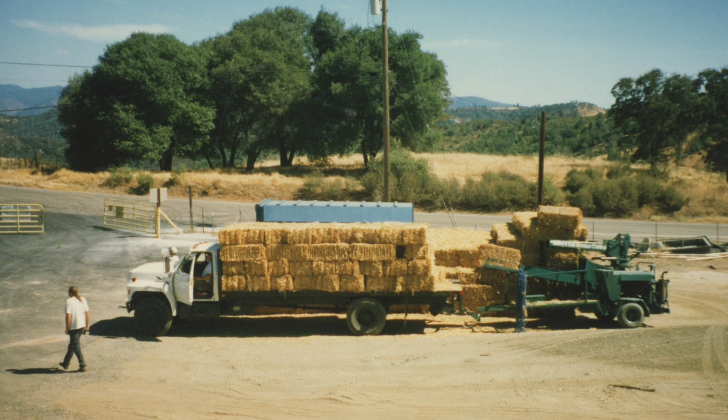Just introduce myself and my business partner. I'm Jay Selby. SSEC is our company. And this is Brandon Coppage. He's my partner in the business. Been around for 50 years. My dad started this company in '68. So he was a little ahead of the curve even before the EPA and other things. And we've done a lot of projects, a lot of your guys' work over the years, including Oroville Dam and some other big ones.

Sorry, I'm not a public speaker and my allergies are kind of getting me. So my voice sounds like it's shaking a little bit. It's definitely because it is.

So I try to put this together for you guys, looking at it from your guys' angle, like how to set up a job from the start and then all the way through inspections and maintenance. That's how we tried to outline this presentation for you. First off, we're going to be talking about the different hydraulic methods, the different applications, where those are effective, where they're not effective, and where different BMPs might be mixed in the middle of that as well.

So the keys to a successful erosion control project are going to be to conduct a soil test. This is something that we've been working with Caltrans a lot on the last 3 years, really getting in there up front and getting a soil test done so we know what we're working with. Now that can be very difficult because a lot of times the dirt hasn't been moved yet. And a lot of times excavators will go down 20, 30 feet, so you don't really know the soil conditions of what you're dealing with until the grading is done, right? But it is very key in having a successful project. We'll go deeper into that later.

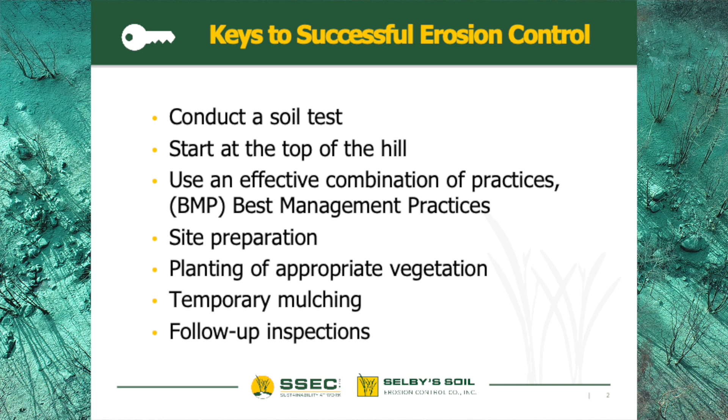So there are many methodologies for temporary, but a hydraulic application of hydromulch is definitely one of the most cost-effective ones in regards to stockpile maintenance or things like that. There's temp cover with plastic, and that can be kind of a bear to manage throughout the winter. So hydraulic methods definitely are the most cost-effective ways.

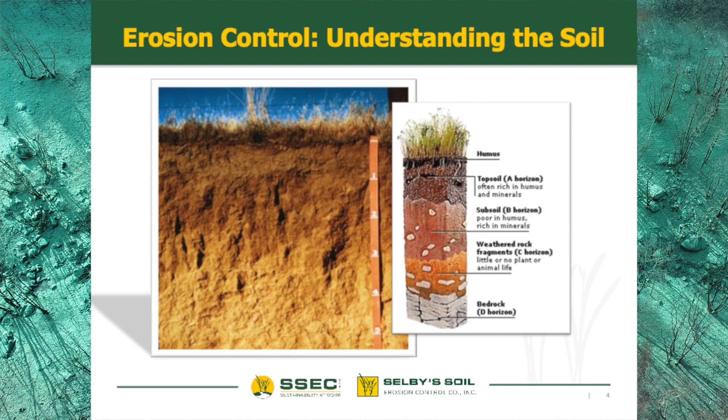To understand the soil is really what we're trying to do. If you look at the different layers of humus down to bedrock on this screen, as excavation of projects happens and an excavator takes more and more dirt off the top, we're left with these weathered rock fragments, and now we're trying to sustain plant life. We're trying to establish natives when we're down to that layer. So that's why the soil test is really so important, because we need to know what we need to do to help that soil start creating a good seed bed. So Soils 101 is if you take care of your soils, then your soil will take care of you.

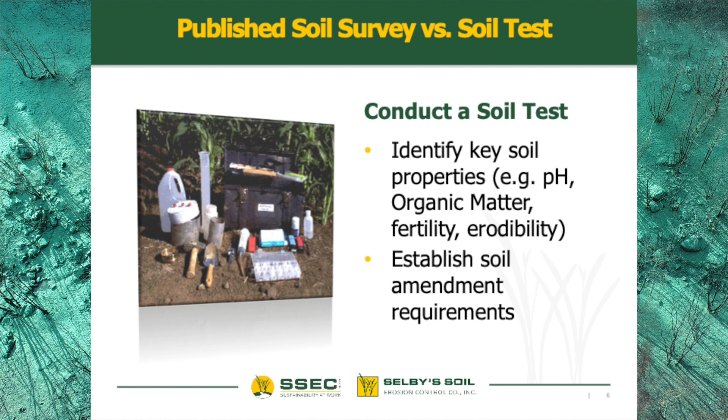So again, this is the soil test. I meant to bring a couple of little kits. I don't know if you guys are all familiar with soil tests or not, but you go around your project, you pick a few spots to dig up a shovel full, maybe put it in a 5-gallon bucket, mix that soil up so it's showing representations of all over your project. And then you can real easily throw it in a bag to send it to a lab. It's a less than $100 test, and now you have something to go off of.

So again, like I said, this is something that I think Caltrans is right there. They're just about to pull the trigger on their new spec writing and make this part of every project moving forward. They're just trying to figure out where to plug it in, because from a contractor's side, we've already bid the job before the excavations happen, and then how do you manage that?

Can you do it? Yeah, a lot of our work we do foundation cores, and maybe we could test at the level of excavation. So we'd have to work with geology. Exactly, but it'd be great to do up front, because then you can know your right fertilizers, your right amendments, and we'll go a little bit deeper into that too. But yeah, that's a great point. They don't usually do that on Caltrans style work, but your guys' work, yeah, with the core samples, yeah.

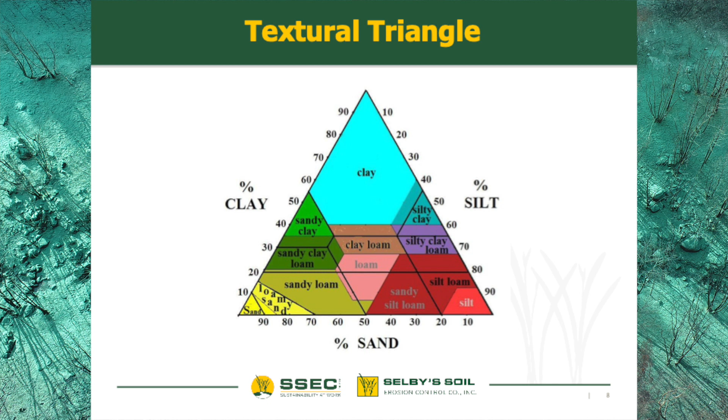So soil texture, erodibility. It describes the three sizes of soil particles; the three major ones are sand, silt, and clay. And I'm just going to roll right onto the next slide. This is a great tool to figure out what kind of soil we're dealing with. And if we know the erodibility of the soil, we know its characteristics, it's going to be easier to design and implement a good hydraulic or BMP solution to make sure we don't have erosion.

So you can see there, on the scale, where they are, and then after your soils report comes back, you look at where you're at on this triangle, and then say, okay, some of these hydraulic methods might not actually hold up. We might have to go to a rolled erosion control netting or something.

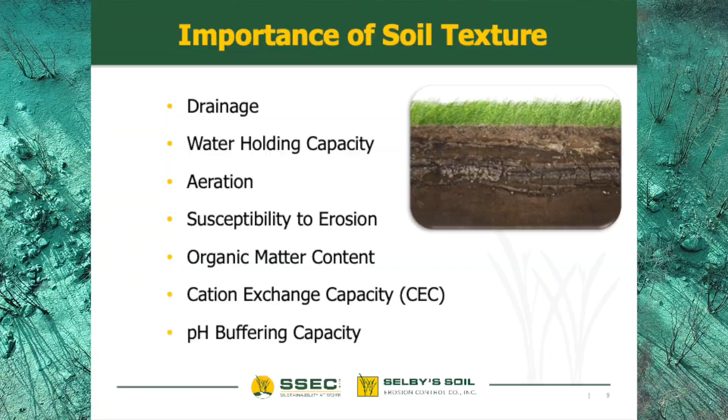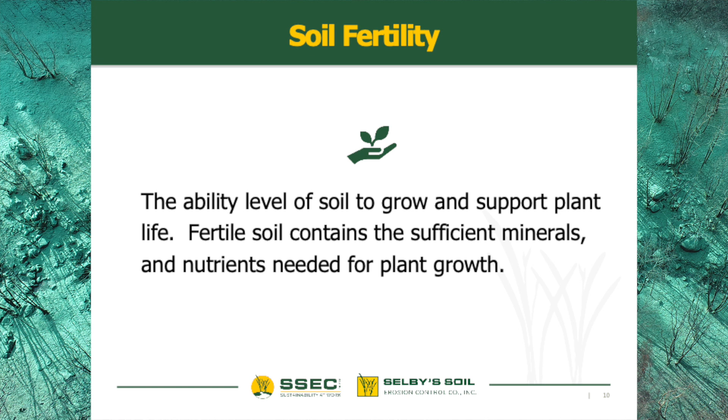Okay, so importance of soil texture. Drainage, the water holding capacity, the aeration, the susceptibility to erosion, the organic matter content, and the pH capacity and buffering. So those are the main things we're looking for when we're looking at the soil texture. Soil fertility is the ability of soil to grow and support plant life. Fertile soil contains the sufficient minerals and nutrients needed for plant growth.

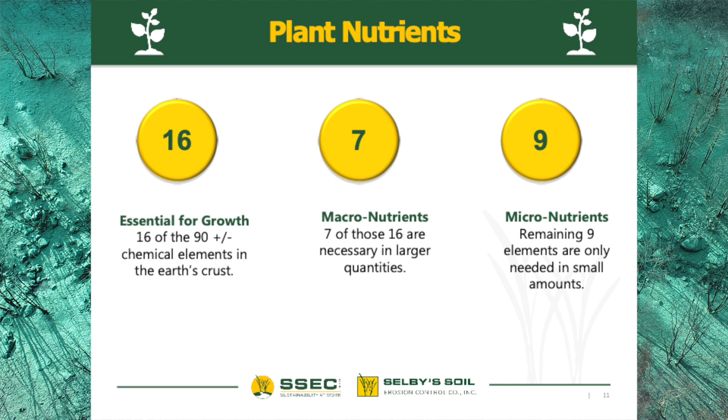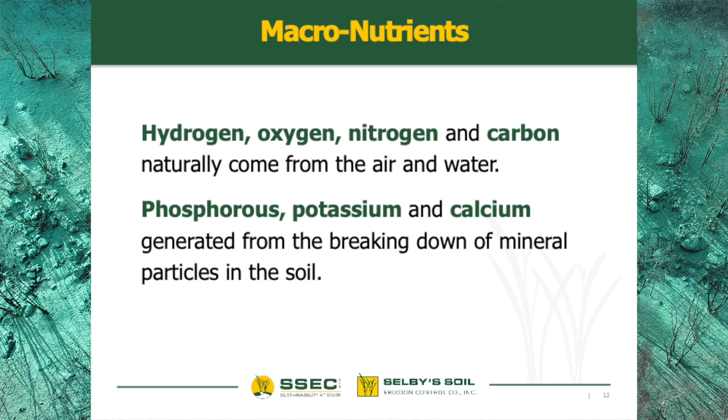So 16 of the 90 chemical elements in the Earth's crust are essential for plant growth. 7 of those 16 are called macronutrients, which are there in the middle, and then the micronutrients on the right are the other elements. So here's our macros: hydrogen, oxygen, nitrogen, carbon, phosphorus, potassium, and calcium. So that's what we need to get growth.

So again, the soil test tells us a lot. We can run a soil test, look at our soil pH and find out what's going on there. And there's a lot of amendments we can utilize to balance the soil. But the problem we see a lot is we do projects where it takes 6 months, 9 months to realize there's an issue. Like, this didn't grow right, what's going on here? So now you've lost a whole season, really. So again, the importance of trying to get this stuff done up front.

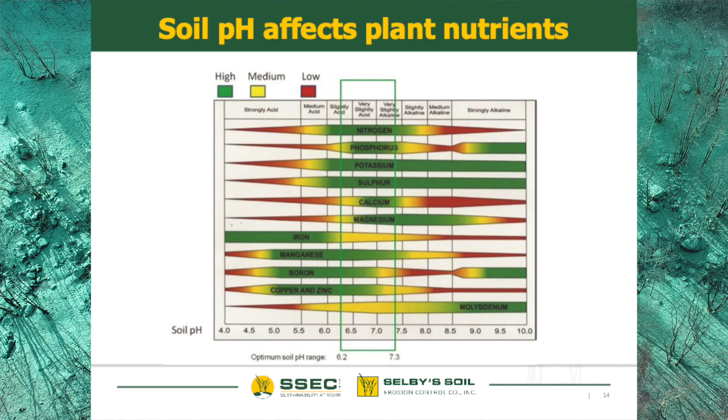This gives you a better and easier to look at screen here. It gives us our tables and what we're looking for, those macronutrients, and seeing where we're at, if we're way too acidic, if our alkalinity's way too high. And again, these are all tools we can use to design better fertilizers and amendments to go along with it. So any questions so far on soil testing or pH levels, anything you guys can think of?

I have a quick erodibility question. Sure. You were talking about how soil texture impacts erodibility. Is there a rule of thumb on what proportions make something more prone to erosion? So yeah, clays are generally a lot less susceptible to erosion than a sandy or silty soil, but you really want a mixture. You need all those elements in any kind of soil, but you want more of a balance, I should say. If you're dealing with 70-85% sand and silt, it's definitely going to have a lot more erodibility. Does that make sense?

Yeah. You were talking about weathered rock fragments; does the gravel size component also contribute to erodibility? Yeah. The deeper an excavation project goes, obviously the more rocks come into it, which isn't as bad from an erosion standpoint, but you've lost all your nutrients on top of it. So it's kind of one or the other.

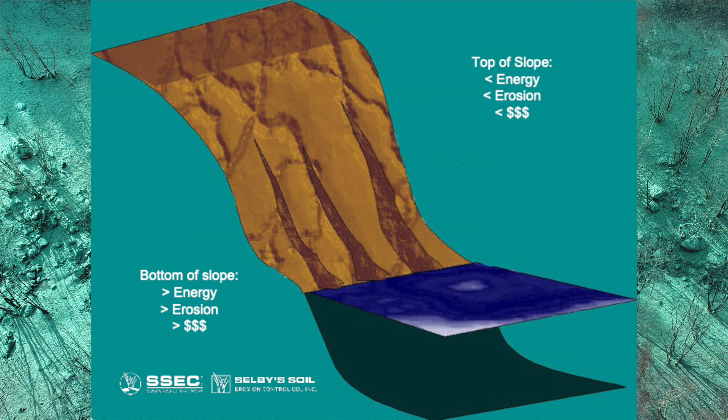So this slide just really shows you, and I talked about it earlier, that erosion starts on the top of the hill. And so if you don't spend the money on the top, by the time you get down to the bottom, you've really cost the project a lot of money. If you have to go back and repair these slopes and rebuild them and then revegetate again, just by ignoring a problem of the erosion on the top of the hill, it's just not smart. So, preparation.

For one, horizontal track walking already creates a rivulet in the ground where possible erosion could happen. Plus, the water speed as it runs down that slope is going to be increased. On vertical track walking, we've done a few things here. We've created a seed bed, a little catch basin to hold moisture and the seeds. So whereas with horizontal track walking, the seeds could end up at the bottom of the slope, with vertical we've got a nice little seed bed prepared, and again, less susceptible to erosion. So I'm a big proponent of that.

There are other types of preparation that you can do, there's lots of farming things out there, ring rollers and everything else that prep the ground. But honestly, for what we do, I feel track walking is the best.

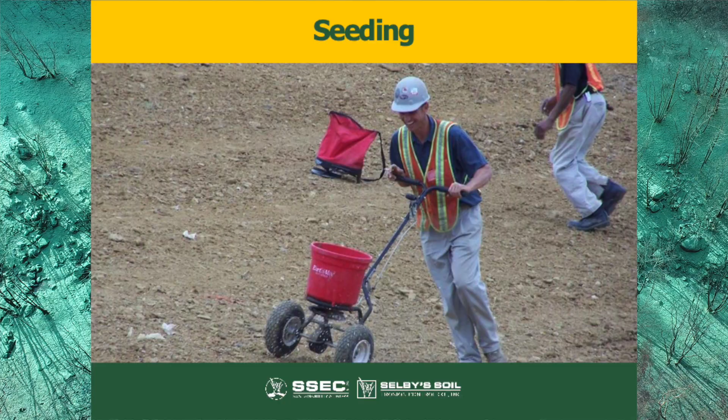Okay, so we'll talk about some of the seeding now. So again, there's various methods, tractors, hydroseeding. I wanted to go into actual seed because, looking at this more from an inspection standpoint for you guys, this is your variable, okay? There's standardized pricing across the board on a lot of products used in our industry. But the seed is the variable because we're always trying to get that native mixture.

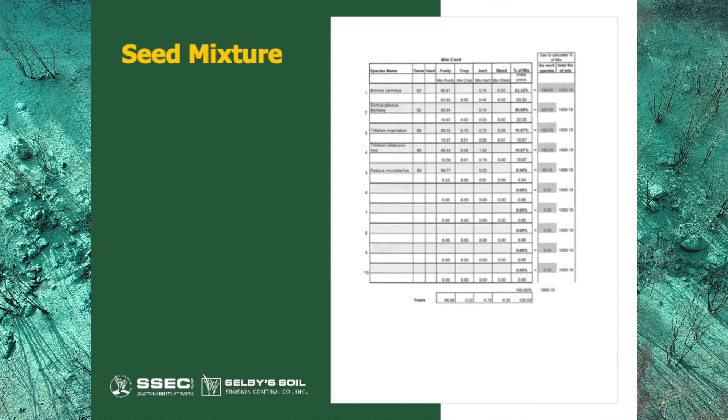But this again just shows you what they come up with to do their math to make sure they're hitting the right percentages of every seed. And then this is actually what you guys would see on your job site.

How does that work if you've got different lots of seed based on their speciation? Yeah, that's why we don't order seed until it's ready to be placed, because once you blend it in the bag, you're done. Does it go to the lowest sell-by date? In that case, yeah, it would. So we generally don't order it until we're ready to use it. But we're making sure that the seed companies we're buying from are testing and staying up. Yeah, but you're not the one mixing it; it's the seed company. Correct.

Exactly. So some agencies, SFPUC is probably the most famous for being a very stickler on their seed. So a lot of times we actually order it at the beginning of the project, and then they set a time mark where they gotta have the seed in, but sometimes the civil contractor won't get it done in time, we'll have to reset, and they'll require retesting, recertification on everything.

Yep. So again here, it's showing your purity, showing your germination, but it's not really showing your pure live seed. It's a 50-pound bag. These are just all things during the inspection process they need to make sure they're looking for. Bulk seed is what it is. So if you buy 50 pounds of bulk seed, it's exactly 50 pounds. But if your germination is only 93%, and then, actually, let me go back a couple slides. This will make more sense.

So see down here, we have a germination of 93%, and then we have inert matter of 0.78%, and then weed of 0.55. So that's how they figure out that germination right there, okay? So if you ask for 50 pounds of pure live seed, in this scenario, you'd probably end up with 60 pounds of bulk seed. Does that make sense? So you're really getting what you're paying for.

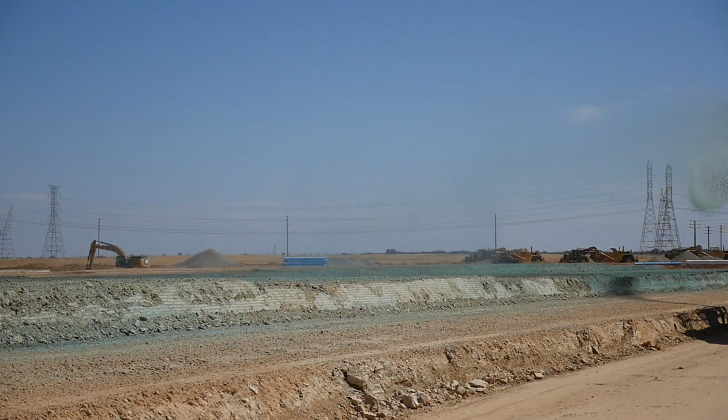But now with a hydroseeder, you've got a tank, and that truck was on a different job the day before. Let's just be honest. He was out shooting some subdivision in Elk Grove, and now he's showing up on your levee the next day. And how do you know what you're really getting on your levee? So I think it's important, and we're trying to push this too, moving forward, that you get wash certificates from your contractors, and that it's verified.

You really don't want to, like I said, they could be planting something totally different. They might be doing an athletic field with that same hydroseed equipment, and now you just put a sports blend on your levee.

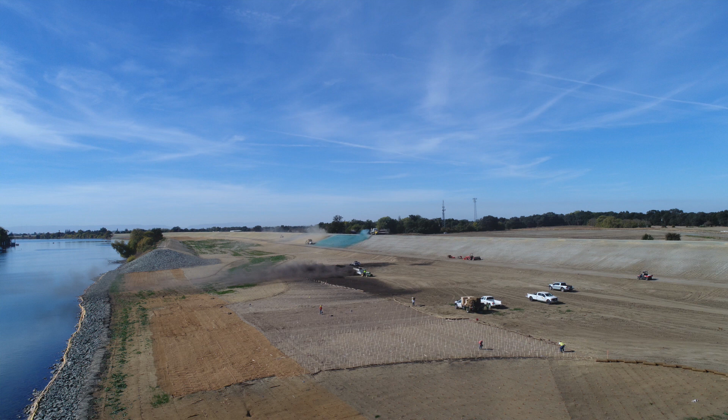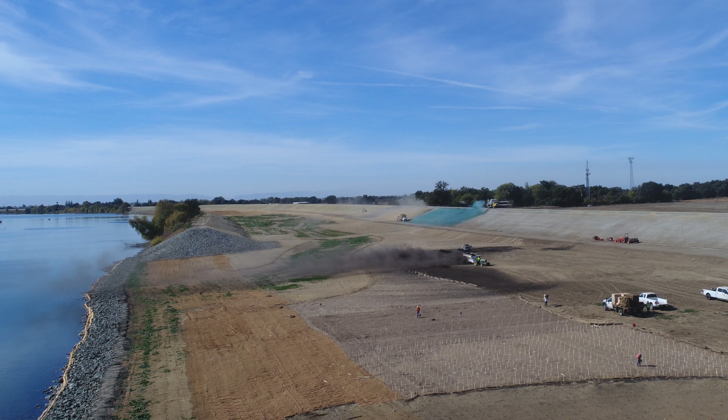In the basin of the floor down here, we were grain drilling, spreading compost, adding amendments, native straw, and then we were rolling a netting over top of it. But can you see from this tractor and this compost spreader that dust cloud all the way to the water? We're having more and more problems with the Air Resource Board and the Clean Air Act on some of the products we've been using forever in erosion control, and blown straw is one of those as well. We're getting a lot of dust coming off the straw.

So now you have the water board and the air board kind of fighting each other, because the water board's telling us we want straw on this project, and the air board goes, well, we don't want all the dust it's creating. So something we've been utilizing a lot, and this other slide to the right is showing a hydroseeder putting on this Proganics material. Brandon, you want to maybe grab that and pass that around the room? So we're trying to find the right recipes to put amendments and get stabilization and get growth.

And so we've found that in some cases these new soil medias, like this one, it's called Proganics, do a great job because we can hydraulically apply it. We're still getting a ton of nutrients there for the plant life. So just something to think about, and it just depends where the project's at, really, if dust is a major issue or not.

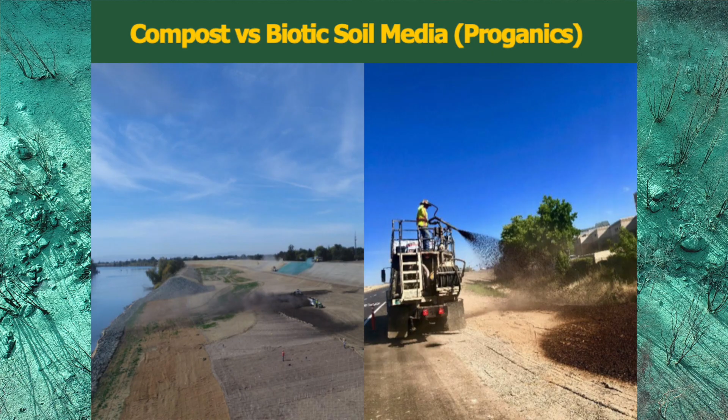He's going to pass that around. I was actually surprised. The slide on the right is the Highway 65 bypass widening job. I don't know if anybody lives in Roseville or drives that at all, but that whole area has been really congested for a while. We had commercial buildings, we have the mall, we have everything right around there, plus live traffic, and so Caltrans agreed with us on this one. Like, yeah, we don't really want that dust flying everywhere around here. So that's the project we used this one on.

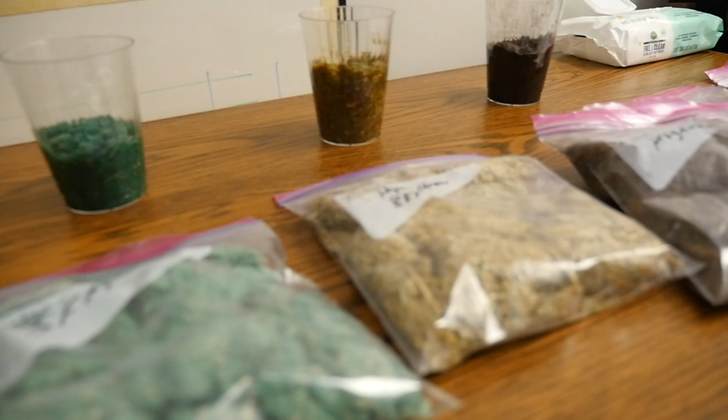So, types of surface mulches. In fact, this is where we'll just start passing these things around. So we go through all the different mulches that might be used, and we didn't bring a bale of straw in here for you. But wheat or rice straw is a typical mulch that's used for erosion control. We generally like to use rice more than wheat, unless you're wanting to plant wheat on your job, because that's what you're doing when you're using wheat straw.

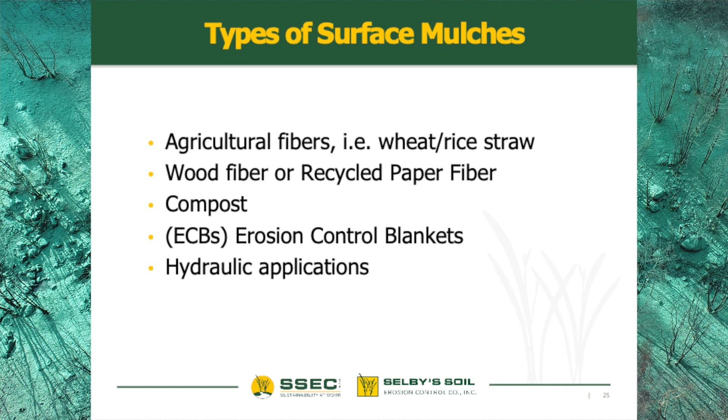So rice only grows when it's submerged in water. You've seen rice fields before. It has to be completely submerged in water to grow. That's why we love it with native seed mixes, because it doesn't grow, so it lets all the natives establish. Okay, so then we have a couple of the other different fibers, which is wood fiber or recycled paper fiber, which Brandon will start handing those down. Again, I'm just giving the broad scope. They all work relatively the same on the fibers.

Compost can also be a surface mulch. Its erosion control value is maybe not as good, but we've been playing with compost berms and things like that that actually have been holding up. I think the jury's still out on them right now, is kind of how I feel about it. And then of course we have erosion control blankets.

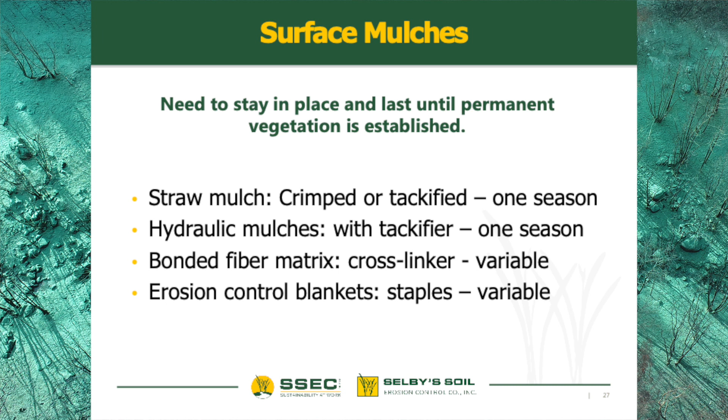So by themselves, straw mulch, either crimped or tackified by a hydroseeder, is a one season application. Most hydraulic mulches are one season, unless you've added seed to the mix. The bonded fiber matrix and the erosion control blankets can last longer than a season, but again, until you put the seed component in there and really establish growth, you don't have permanent erosion control.

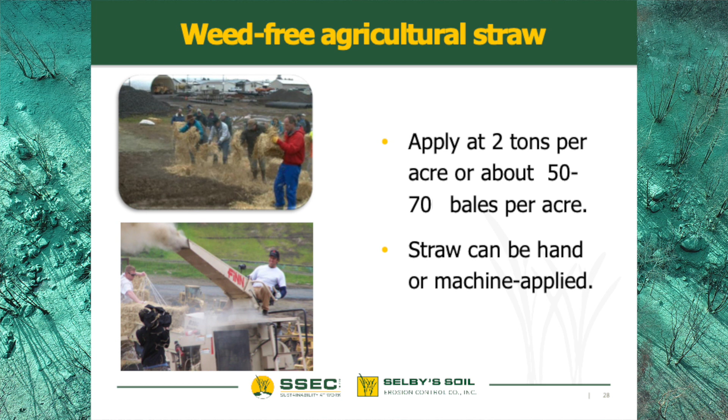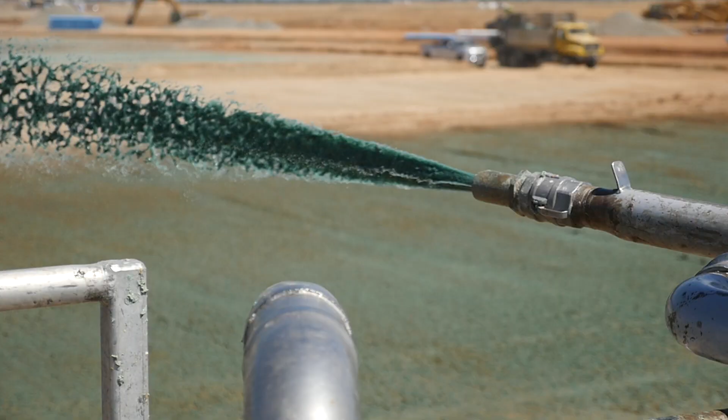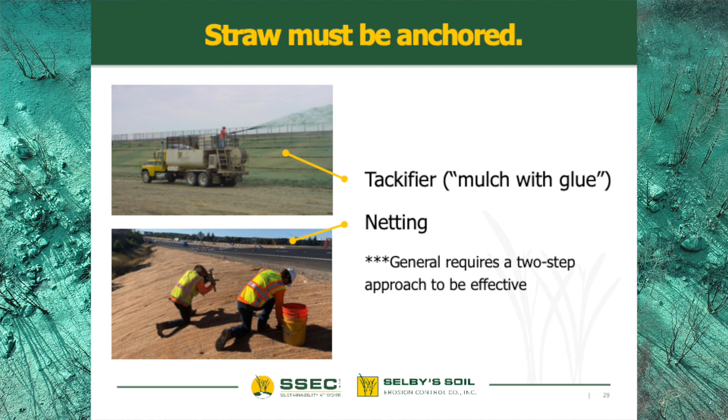We're going to a lot of no-net blankets. Honestly, there's a lot of Curlex and other style blankets that are locking themselves together without nettings. All the blankets now are all natural, so they use a hemp weave in lieu of the photo net now. So you can actually get straw coir mixes, all with an all natural netting on both sides.

But TRM has been a plastic blanket that's been used in waterways a lot, and coir finally came up with 980 and some higher flow rated netting that will actually meet the water regulations, but not capture any of the wildlife. So Fish and Wildlife have actually started pushing more towards the coir and away from the TRM, which is that turf reinforced matting that we used to put in streams 5-6 years ago, and they've faded away from that a lot.

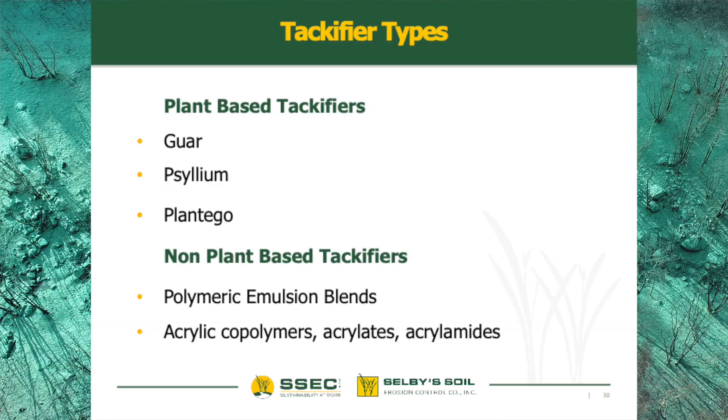Yep, exactly. Okay. I was going to go through some of the different tackifier types. So we have our three major plant-based tackifiers. So this is a glue that's derived from plants. So we're staying green. We're using Mother Nature to help us out in erosion control. These are typically the main three that we use. Psyllium not so much anymore. Guar and Plantago are the main two.

And then these are non-plant-based tackifiers, which I feel like had a lot more impact in our erosion control world maybe 15 years ago, and it's kind of been fading off ever since. There are some questions on if copolymers and polyacrylamides should be introduced with some of our aquatic friends. So we generally like to just stick with the plant-based ones if we can. But there are places that polymers can be effective and can help, but it's more on the dust control side.

Right, we've used them in Southern California when we had seriously steep piles and dust and high winds, and we needed to glue it together. We use things like Rhino Snot. Exactly. Yep. Same thing I was thinking of. So okay.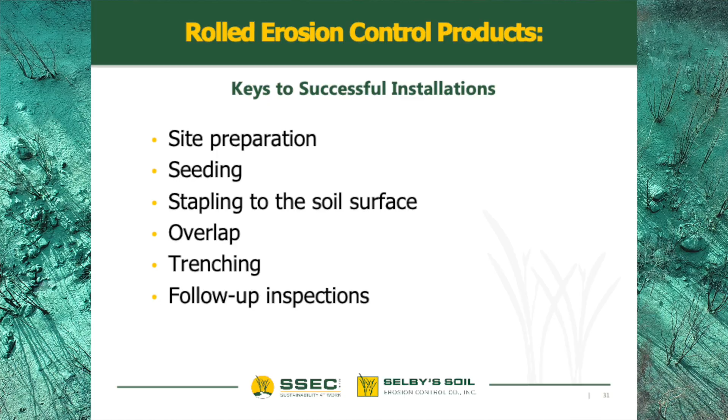So keys to successful installation on erosion control products. So our site preparation needs to be good, especially when you're dealing with rolled erosion control, any erosion control blankets. If you don't have soil contact, it's pointless. So having somewhat of a workable surface is great. Seeding, stapling to the soil surface, overlap, and is it trenched? And then follow-up inspections. So I'm going to go through this kind of quick because this is going to kind of show us an idea.

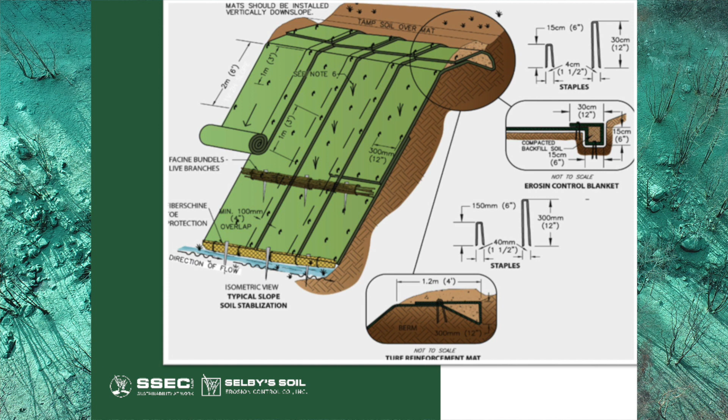So this is a proper installation. I've got another slide I want to show you too. This is typically what we see with, we call it kind of the burrito wrap, where the key trench is cut, the blanket's laid through there, it's backfilled with soil, and then it's flipped back over itself. You'll notice that the direction of the flow of water is heading this way. So your overlap is working with your direction of flow. See that? We're breaking up the water that's running down on the original blanket.

This one is bundles of live branches, but that could be fiber rolls, that could be anything that's breaking up that sheet flow. And what we're trying to do there is just really try to slow the water down. So then they got the proper pinning installations here, and it's just a good little diagram to show you how to do it. This is, again, that same project I was talking about, Southport Levee, that we just finished up for the Corps of Engineers not too long ago. There's a few things going on here, so I'll kind of talk through them.

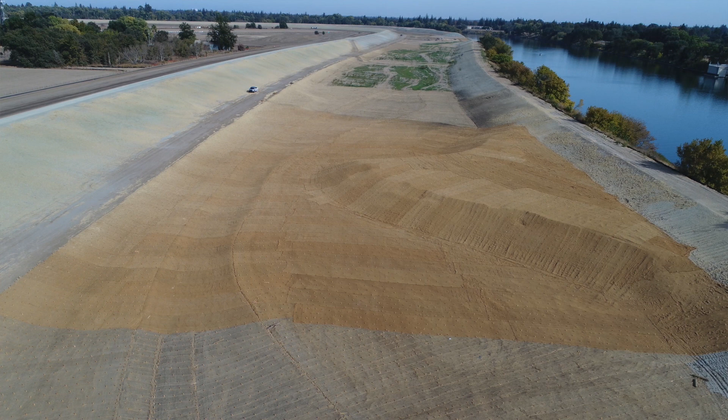So what we did up here is this contract breached the levee and created a low flow channel that works its way back up the project. You can see it already started growing on us while we're still working there. We didn't know we were going to encounter it, but we did over here, an Indian burial ground. So the way that we were going to install this blanket had to change quite a bit. So first off, our overlap on the low flow had to work with the directions there. We have a slope working down this way, a slope working down this way. So our overlap and our trenching patterns had to match. You can see on the low flow channel, we had to trench both here and over here.

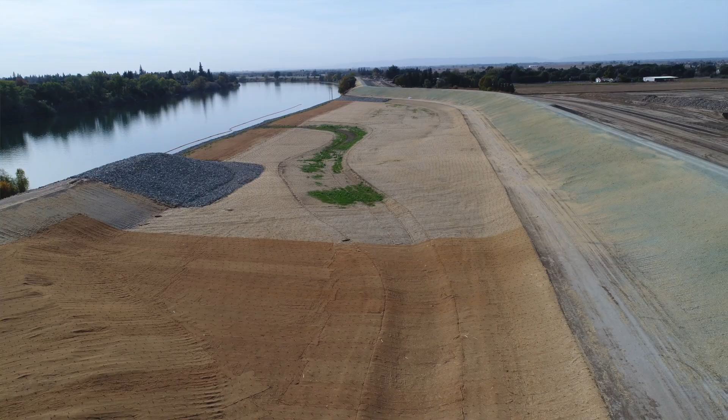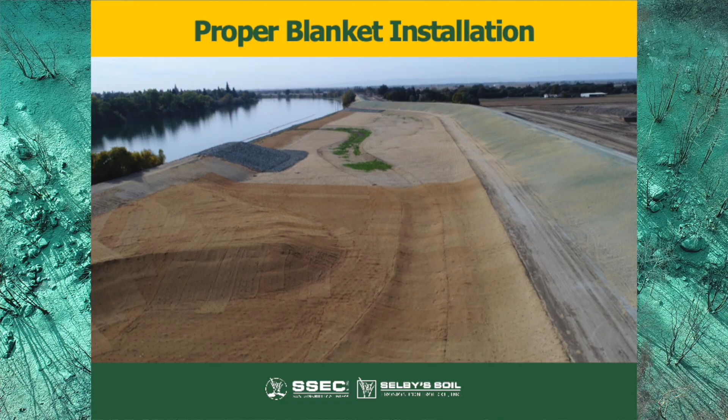And then as we're working off this Indian burial ground, we have to keep the blankets going the right direction for slope and flow. I just came across this photo, I thought that's a pretty good one. Because then we had to do another key trench here to protect that frontage of the water, and then run the overlap a little bit differently over there. So I just thought it was a good slide, kind of showing you proper installation.

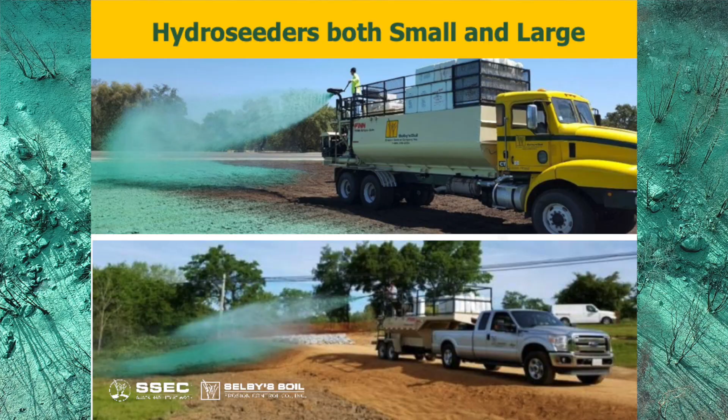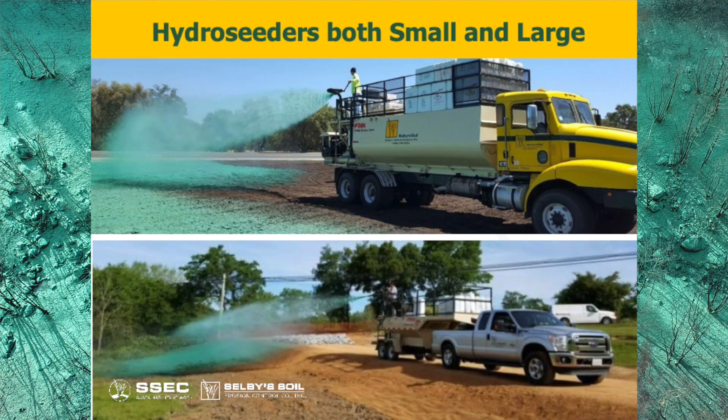So, obviously this is like a 4,000 gallon hydroseeder, where this is a 1,200 gallon. So depending on your size, you need to be able to pivot and make sure that your contractor is giving you what they should be giving you. So that's a discussion you have with them up front. It's like, okay, what's your capacity? What's your size? What's your plan of attack? How do you achieve this pounds per acre? How do you know that you're getting the right amount of seed down per acre? So again, these are just conversations that should be taking place before anybody starts work on one of your projects.

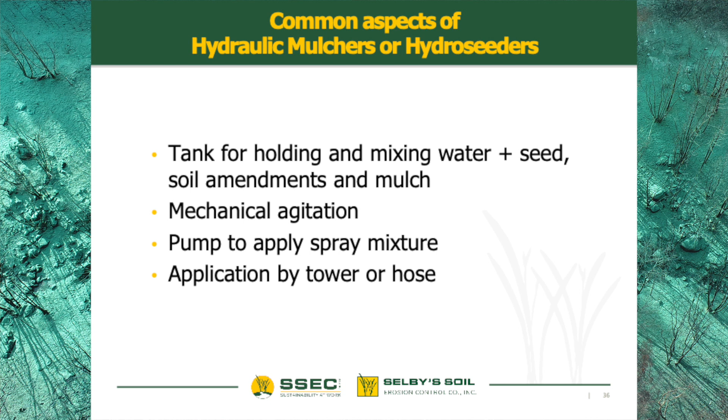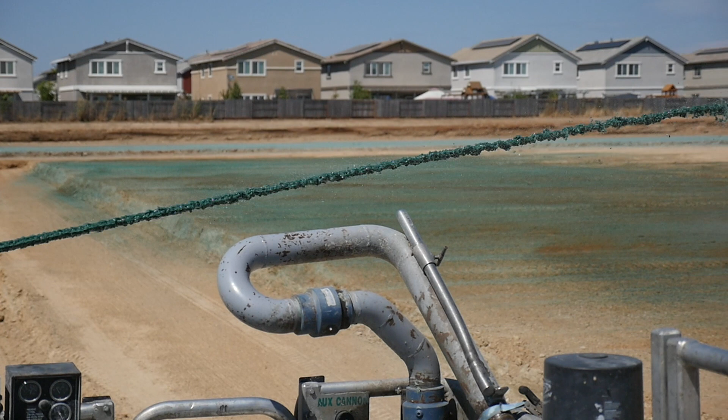So the common aspects of the hydroseeders is a tank for holding and mixing water and seed, soil amendments, and mulch. Then it also has a mechanical agitation system, so the material's being mixed and everything is kept consistent. Why that's important is if it wasn't continually being agitated, or if you didn't have enough mulch, a lot of times the seed will float to the top. Now all of a sudden you're spraying out the whole tank, and all your seed is on the last little stretch. So to have an agitation system is very important for that. They'll have pumps to spray the mixtures, and the application is either by the tower, which is on top, or by hose and a hose reel.

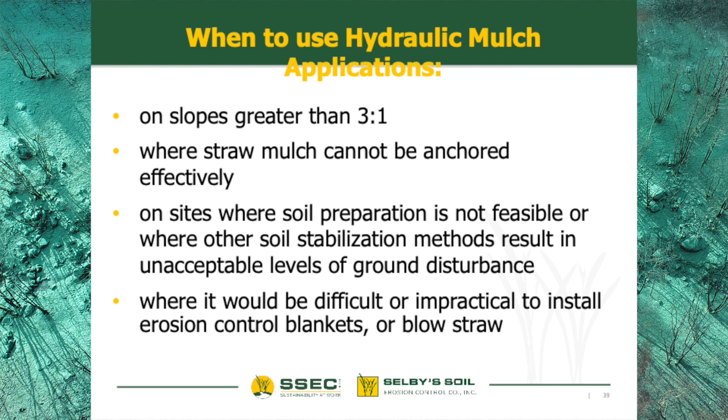So when to use hydraulic mulch? A lot of farming methods work, and we've used farming methods on DWR projects in the past where we've broadcast seeded, grain drilled, done something like that. But when you start getting slopes greater than 3-to-1, you really need something else to hold it. So in that scenario, especially with a tall slope, we recommend hydraulic mulch. Straw can't be anchored there. Also on sites where soil preparation is not feasible, or where other soil stabilization methods result in unacceptable levels of ground disturbance, and where it would be difficult or impractical to install erosion control blankets. We run into that quite a bit too. And again, when you start getting into erosion control blankets, the price of the project's going up.

When to avoid hydraulic mulch applications. This is kind of what somebody mentioned earlier. In areas of concentrated water flow, such as ditches or swales, we see this quite a bit, especially with straw mulch. If there is any kind of concentrated flow, the straw mulch just picks up, travels down with it, makes a big berm somewhere, and then you have another blowout downstream. So do not use hydraulic mulch without including a tackifying agent, such as guar or plantego. Hydraulic mulch on its own without the glues is just going to wash away in the first rain.

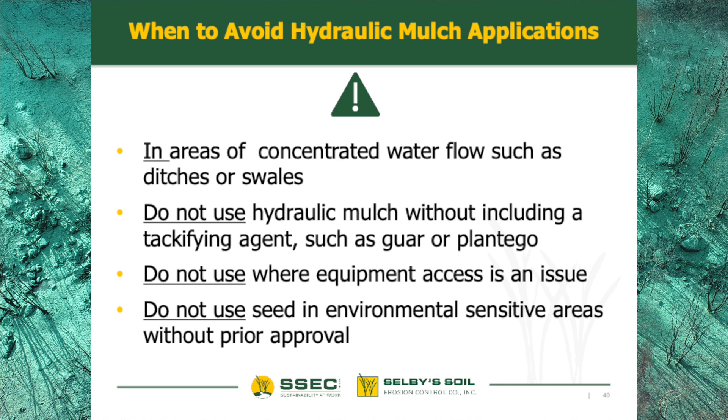There is a curing process for all these glues, whether it's BFM or guar or plantego, generally 24 to 48 hours. So you'll see in a lot of Caltrans specs that no hydroseeding or hydraulic applications will be done within 48 hours of a rain event. They want these glues to actually set up and do their work. Once they're fully cured, they don't re-emulsify, so now you've got this solid crust. Okay? Do not use where equipment access is an issue; it's not meant to hold up to traffic. And do not use seed in environmentally sensitive areas without prior approval, which you guys always do.

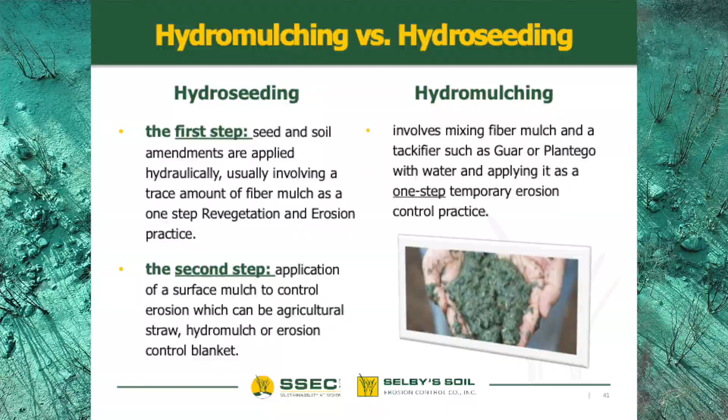Hydromulching versus hydroseeding. In hydroseeding, seed and soil amendments are mixed up, applied hydraulically, and usually that is followed by a second step, because that's usually not enough. The second step could be another application of hydromulch. The difference between hydromulching and hydroseeding is that of seed. Hydromulching, like it says on the slide, involves mixing of mulch and tackifiers applied as one step. In hydroseeding, after the first step goes down, you want your seed as close to the soil as possible. You don't want to develop air roots, which can happen.

Like if you did a straw mulch and then tried to hydroseed over the top of it, that little gap right there could make the seedlings develop air roots. Yes. Okay. So a second step is generally going to take place, whether that be another layer of hydromulch or an erosion control blanket, but it needs that protection layer. I just kind of went down the list. Again, I was trying to think about you guys in the field.

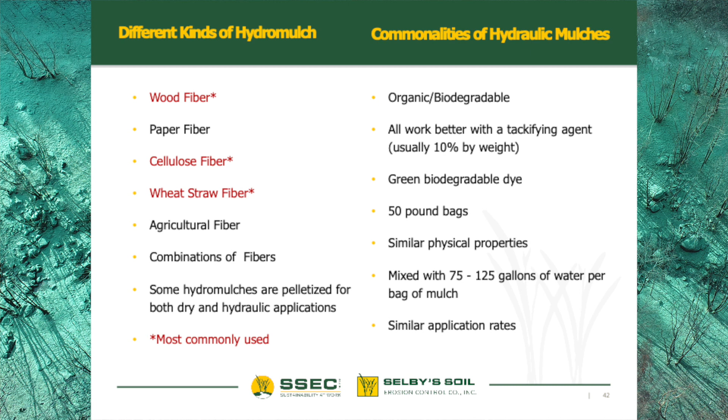Types of mulches, what they would normally see, the properties of them. They're generally in 50-pound bags. There's a lot of different types of fibers out there in the market, but these are kind of the more commonly used ones. Almost all of them have a green dye, but not all of them. I've actually used some mulches in the past that didn't, and it's kind of a head trip because you're just so used to seeing green.

All mulches will do better with a tackifying agent of 10% of the weight. So you got a 50-pound bale, 5 pounds of tackifier. That's kind of the general rule of thumb. So, commercial product categories, things you should know. There are many commercial product categories for hydraulic mulches, and most have been defined by manufacturers, not end users, which can actually be a problem sometimes.

All hydraulic mulches work about the same and perform much better if they include a tackifying agent. Better erosion control on steeper slopes is achieved by a hydraulic matrix. So that's, again, BFM, bonded fiber matrix. In the bonded fiber matrix, the factory that's making the mulch is mechanically securing these fibers together through a heat process and then adding the tackifiers directly in the bale. We can't recreate this in the field like they can in the factories. So that's where these BFMs really come key, but they're also a lot more expensive.

And then to keep costs down, most of these products are made in Oregon, Washington, Idaho. We generally don't use the same mulches that the East Coast uses, just for trucking reasons and things like that. I want to go through application rates because this is a problem I see on a lot of your guys' projects: you're not getting what you're paying for. So it's really hard to track on the inspection side, for companies like us, how much are they really getting out there, unless you're bale counting, pallet counting, pre-measuring everything.

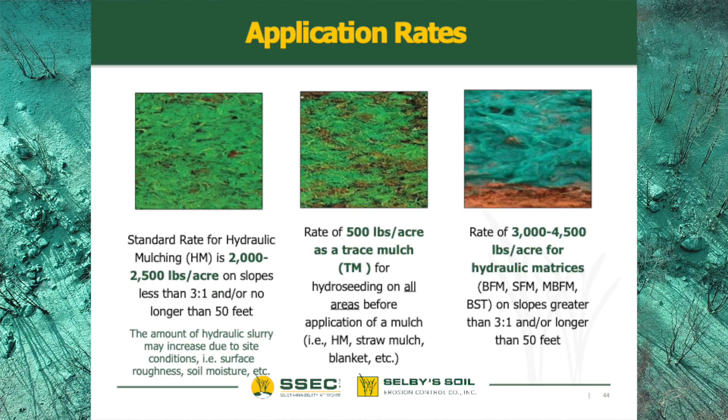So I just did a few slides here to show you. At 2,000 pounds per acre of any hydraulic mulch, you shouldn't see any dirt unless it's a severely track walked or uneven surface. 2,000 pounds now has to spread out over more angles. But if it's flat, generally you're not going to see any dirt. At 500 pounds, you're going to see a lot of dirt showing through. But with a BFM of 3 to 4,500 pounds per acre, it should be a coat. It should be a real layer on there, and it's an easy thing for people to cheat on.

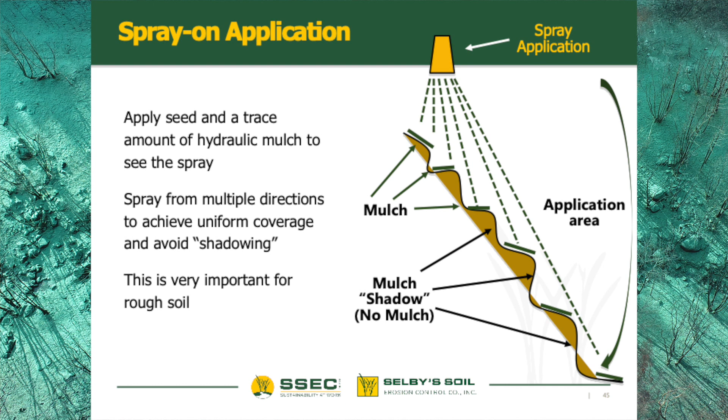So now we're going to talk about those same application rates. How does it work with actual slopes? So we like to spray from multiple directions if we can. We're trying to get that three-dimensional coat to a project, to where anywhere you look at it, there's going to be no shadowing. And this will kind of show you an idea.

It's hard to tell, but that's a track walked slope. So it was vertically track walked from here to the top, and they sprayed it from one angle, and so the mulch grabbed every other track. See how they sprayed it from one angle, it didn't hit the other angles. It's gonna fail. It's not gonna hold up. So, 3-dimensional spraying.

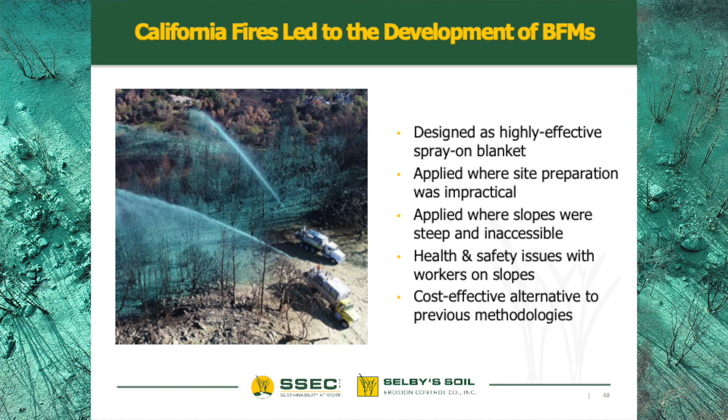You've got trees and everything else. So that's where these BFMs were developed. So, designed as a highly effective spray-on blanket. Oh, where'd I go? There we go. Applied where site preparations are impractical. Applied where slopes were steep and inaccessible. Health and safety issues with workers on slopes, and a cost-effective alternative to previous methodologies. So

I didn't know that was the history of BFM until I looked that up. So that was kind of cool. Learn something new about your own industry, right?

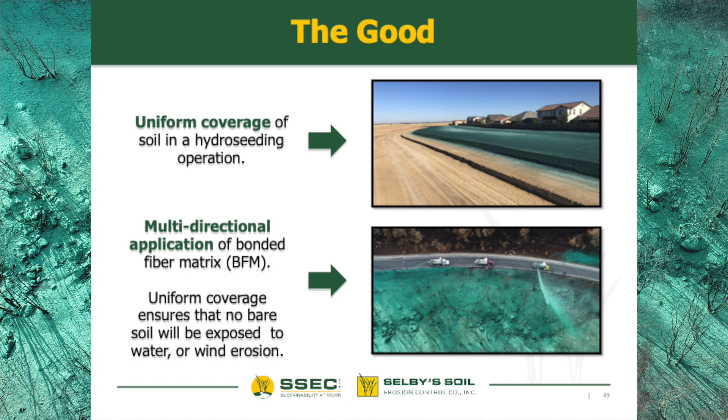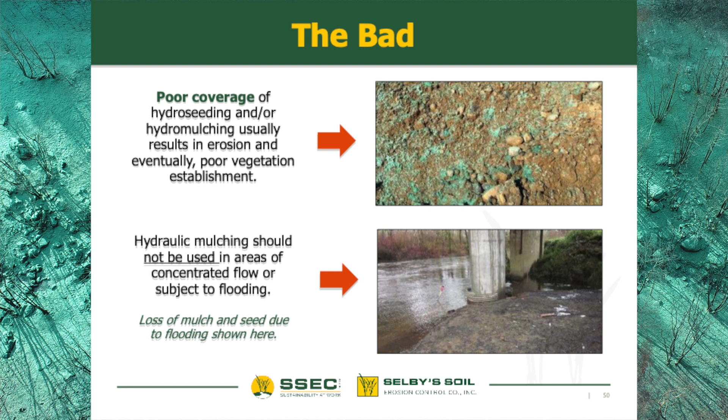And here's some bad examples. So poor coverage, your dirt's wide open. I mean, it's almost pointless you even did anything. Hand broadcast some seed and hope for the best in that case. And then also here, waterways. So this is an area underneath the bridge with raising and lowering waters, receiving waters. And so hydroseeding, not effective, obviously.

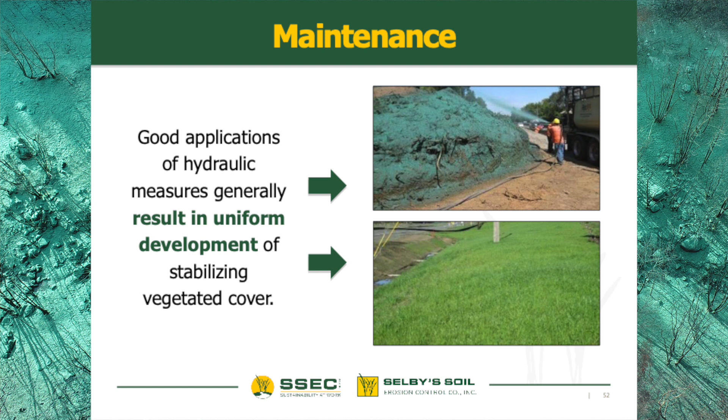And then the ugly, which is no matter what you do, sometimes you're still going to have a slip out just because of improper compaction or oncoming waters, things like that. So then, after you've done a successful project, it's all about the maintenance. So good applications of hydraulic measures generally result in the uniform development of stabilized cover. And that's the end of the day. That's our goal right there. We want a green carpet. We want very little soil exposure to cut down on the chance of any kind of erosion.

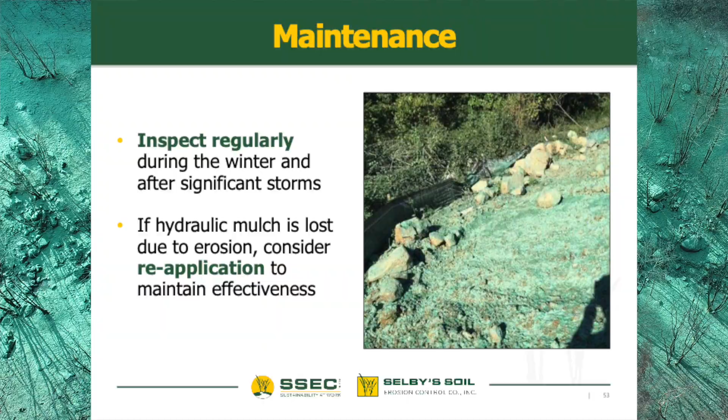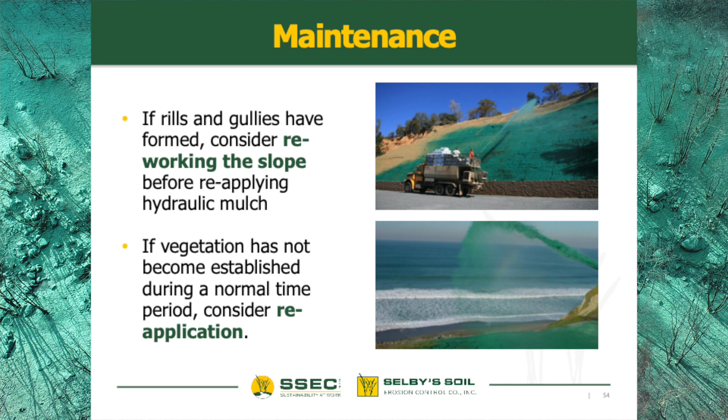Inspect regularly during the winter and after significant storms. I don't know if you guys can see here, but the silt fence is knocked over. Obviously these rocks have been tumbling down, so keep up with the maintenance. If hydraulic mulch is lost, we might need to reapply throughout the winter to guarantee that we can get it stabilized. And again, here's a couple of slides here. There's a lot of rilling going on here. And so this is a reapplication. So if rills and gullies have formed, rework the slope if you can before reapplying a hydraulic mulch. If the vegetation has not become established during a normal time, reapply as well. So I think that is it.

So any questions? Do you have a preference for organic tackifiers over non-organic tackifiers? And non-organic here, like you talked about, acrylic tackifiers? Yeah. You know, the organic ones, like I said, are mainly Plantago and guar, and guar is the best tackifier out of all of them. When you start dealing with copolymers, there can be some issues, like we talked about earlier; they're really good for dust control, but not necessarily erosion control or plant establishment. Sometimes they can actually create too good of a crust. A lot of the copolymers are related to the paint industry. A lot of it can be paint byproducts. And so again, not the healthiest thing. Works great for a temporary helicopter pad in the Middle East. That's one of their biggest sellers. That's where most of those products are sold. But yeah, if you can, guar is the best organic one that you can spec.

You mentioned typically it comes in green color, but you haven't seen it in others. Do you then spec that out? Yeah, it's really a tool for us, but it's become an industry standard. It's kind of funny. I can tell you a quick story about the background of that. My dad, like I said, was involved in this from 1968 on, so he helped develop a lot of the materials used today. The first fiber ever was a fiber by Weyerhaeuser, and it was used to screen peach juice. And so it had a slight tint of peach dye in it, so that all the peach juice looked the same. And when we went up to Oregon to talk to them about making fibers for us, he said, well, can you change that color? And they go, yeah, what color do you want? Make it green. So that's how that started, back in the late 60s. A couple of fiber manufacturers have tried to pull the dye out of it, and us as contractors and the customers, nobody liked it. We've all gotten used to it.